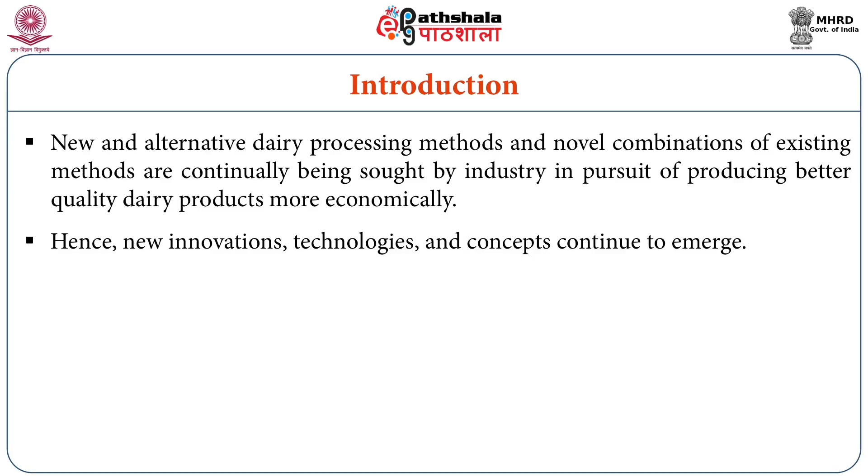New and alternative dairy processing methods and novel combinations of existing methods are continually being sought by industry in pursuit of producing better quality dairy products more economically. Hence, new innovations, technologies and concepts continue to emerge.

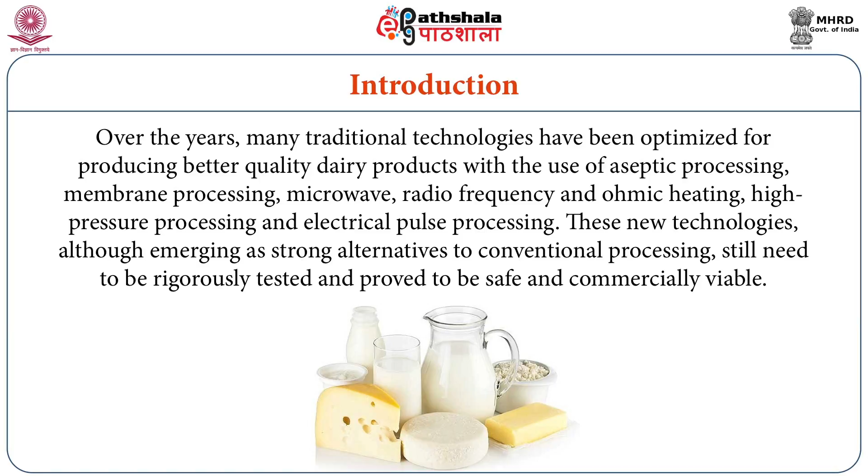Over the years, many traditional technologies have been optimized for producing better quality dairy products with the use of aseptic processing, membrane processing, microwave heating, radio frequency and ohmic heating, high pressure processing and electrical pulse processing. These new technologies, although emerging as strong alternatives to conventional processing, still need to be rigorously tested and proved to be safe and commercially viable.

Dear students, now let us discuss membrane processing. Membrane processing is a pressure driven process in which semi-permeable membranes are used to separate out constituents of milk by use of physical or chemical properties of different constituents. Different membrane processes are ultrafiltration, nanofiltration, reverse osmosis and microfiltration. We will discuss each process one by one with their application in the dairy industry.

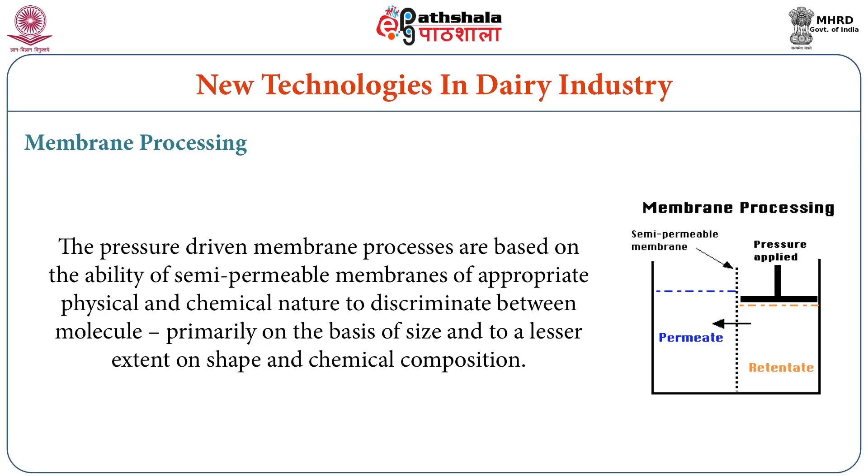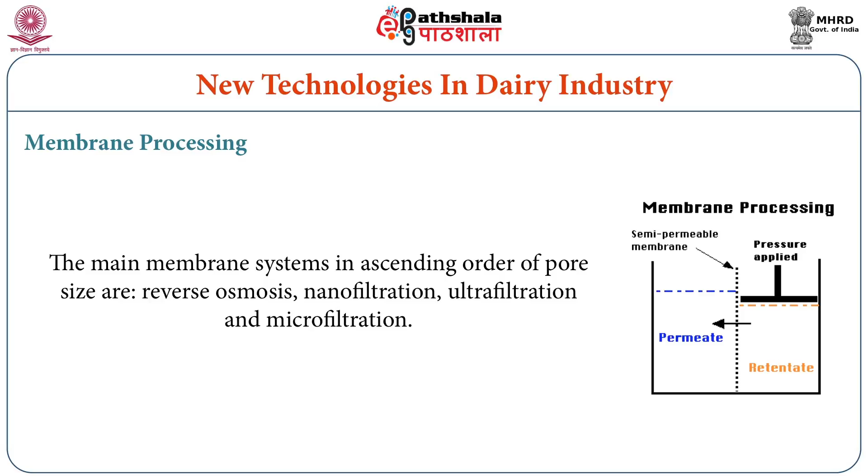The first new emerging technology is membrane processing. The pressure driven membrane processes are based on the ability of semi-permeable membranes of appropriate physical and chemical nature to discriminate between molecules primarily on the basis of size and to a lesser extent on shape and chemical composition. The main membrane systems in ascending order of pore size are reverse osmosis, nanofiltration, ultrafiltration and microfiltration.

The first and foremost used membrane processing application in dairy industry is through ultrafiltration. Ultrafiltration has a wide range of applications in the dairy industry. Ultrafiltration membranes allow separation of smaller molecular weight substances ranging from 10,000 to 75,000 Daltons with operating pressure ranging between 10 to 200 psig.

Ultrafiltration produces from milk a permeate containing water, lactose, soluble minerals, non-protein nitrogen and water soluble vitamins, and a retentate in which proteins, fats and colloidal salts content increases in proportion to the amount of permeate removed.

The ultrafiltration process has been used for milk protein standardization, deproteinization of whey, fractionation of proteins, preparation of biological peptides, manufacture of rasgulla mix powder, preparation of protein rich milk, low lactose powder, manufacture of milk protein concentrates, manufacture of whey protein concentrates or isolates, etc.

Ultrafiltration process has also been used for the manufacture of several fermented dairy products like yogurt, Shrikhand and various types of soft and semi-soft varieties of cheeses. Second membrane processing is reverse osmosis.

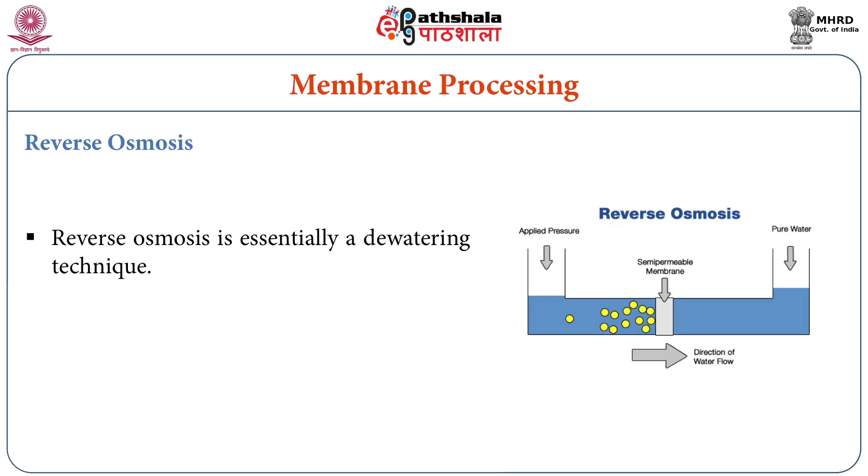Reverse osmosis is essentially a dewatering technique. It can be used for pre-concentration of liquid feed for different purposes. The reverse osmosis membranes are characterized by a molecular weight cutoff of nearly 100 Daltons and pressures involved are 5 to 10 times greater than those used in ultrafiltration.

The potential applications of reverse osmosis technology are bulk transportation of reverse osmosis concentrated milks, pre-concentration of milk for khoa making and spray drying, utilization of pasteurized reverse osmosis concentrate in place of market milk, partial concentration of whey, and partial concentration of buttermilk.

Third important membrane process is nanofiltration. Nanofiltration is a demineralization process. Acid whey can be partially demineralized to about 40%, particularly with respect to the monovalent ions, and concentrated simultaneously to approximately 25% total solids using the nanofiltration process.

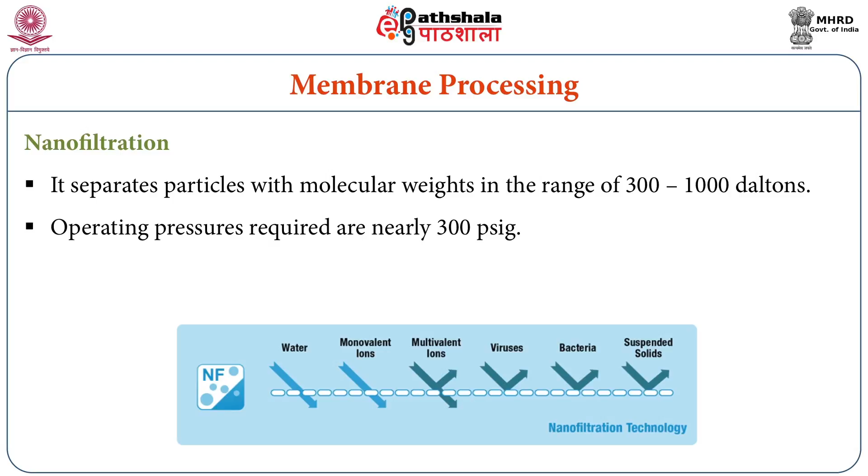It separates particles with molecular weight in the range of 300 to 1000 Daltons. The operating pressures required are nearly 300 psig.

Another membrane processing is through microfiltration. Microfiltration is essentially used as a clarifying process to remove macromaterials and suspended solids, milk fat globules, bacteria and colloidal particles. In microfiltration, membranes with pore size ranging from 0.1 to 10 micron and operating pressure in the range of 1 to 25 psig are used.

The most significant application of microfiltration in the dairy industry is for selective separation of bacteria from milk.

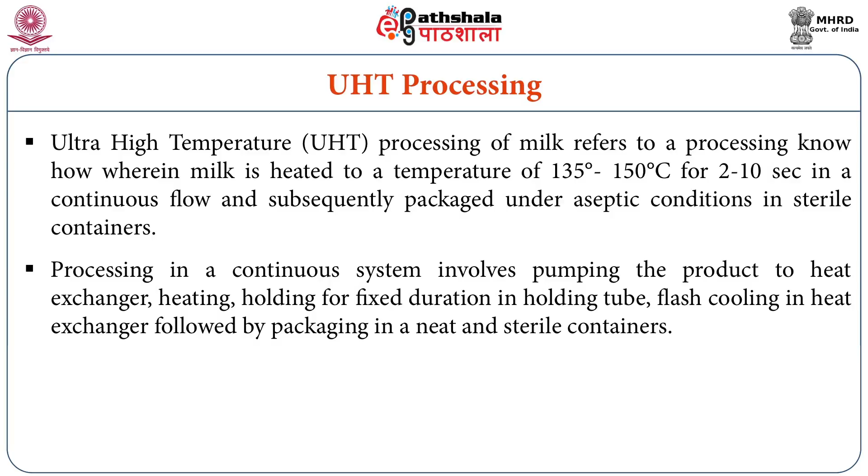Another emerging technology in dairy is UHT processing. Ultra high temperature or UHT processing refers to heating milk to 135 to 150 degrees Celsius for 2 to 10 seconds in a continuous flow, then packaging under aseptic conditions in sterile containers. The continuous system involves pumping the product to a heat exchanger, heating, holding for a fixed duration in holding tubes, flash cooling in a heat exchanger, followed by packaging in neat and sterile containers.

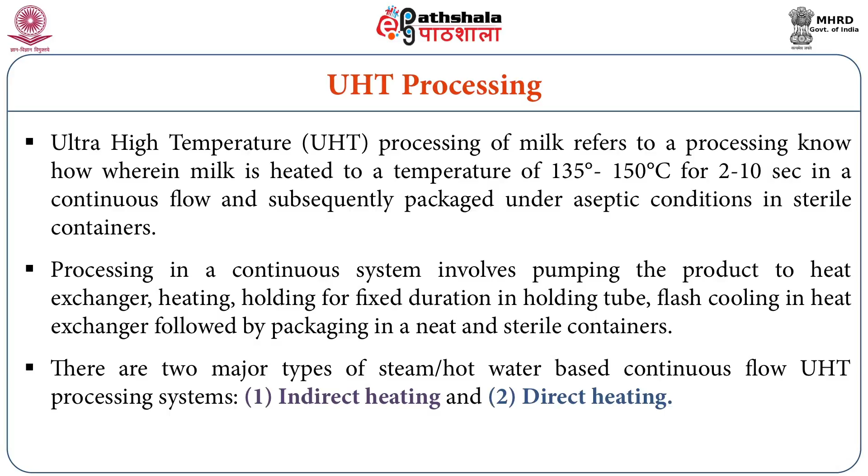There are two major types of steam or hot water based continuous flow UHT processing systems. The first is indirect heating, where the heating medium and the product, that is milk, do not come into contact with each other. The second is direct heating, in which steam is infused into the medium, milk, for UHT processing.

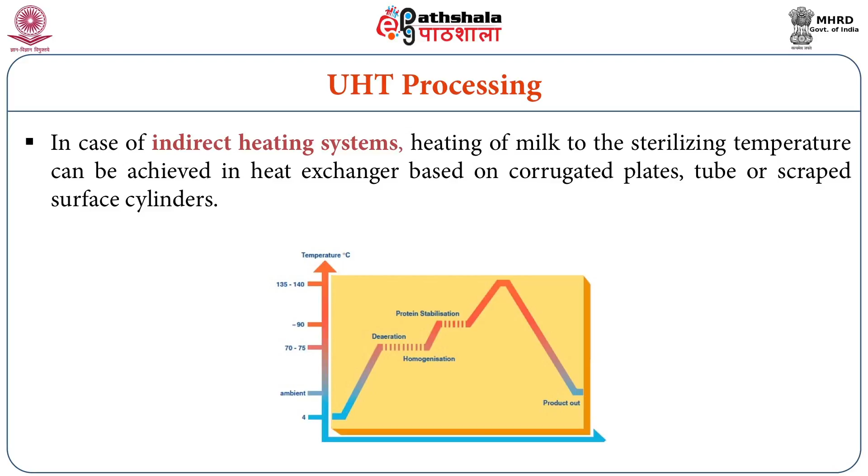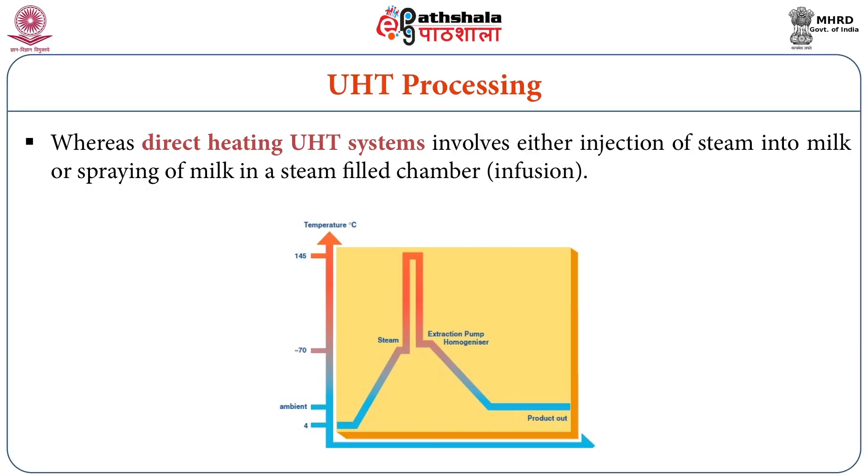In an indirect heating system, heating of milk to sterilizing temperature can be achieved in a heat exchanger based on corrugated plates, tubes, or scraped surface cylinders. Whereas a direct heating UHT system involves either injection of steam into milk or spraying of milk into a steam-filled chamber, also known as infusion.

Ohmic heating is also known as electric resistance heating, direct electric resistance heating, electroheating, and electroconductive heating. The most important benefit of ohmic heating is that heating is very rapid and uniform. The process is ideal for shear sensitive products. Ohmic heating can heat food continuously without needing a hot heat transfer surface, a scraped surface heat exchanger, or tubular heat exchanger.

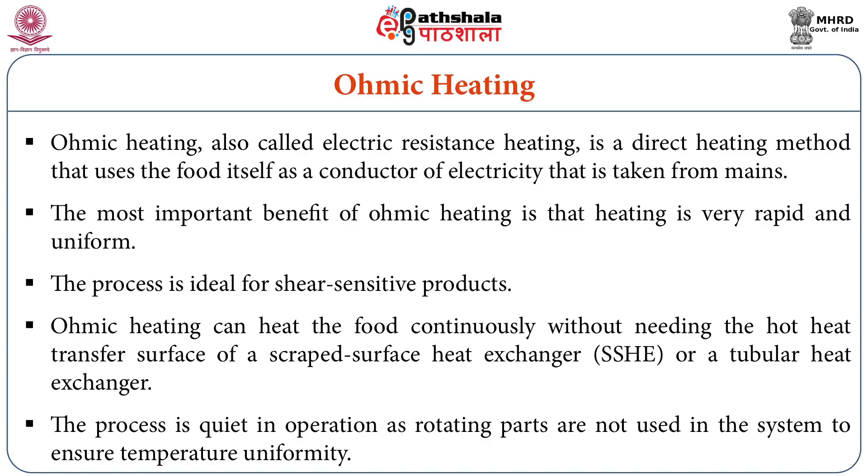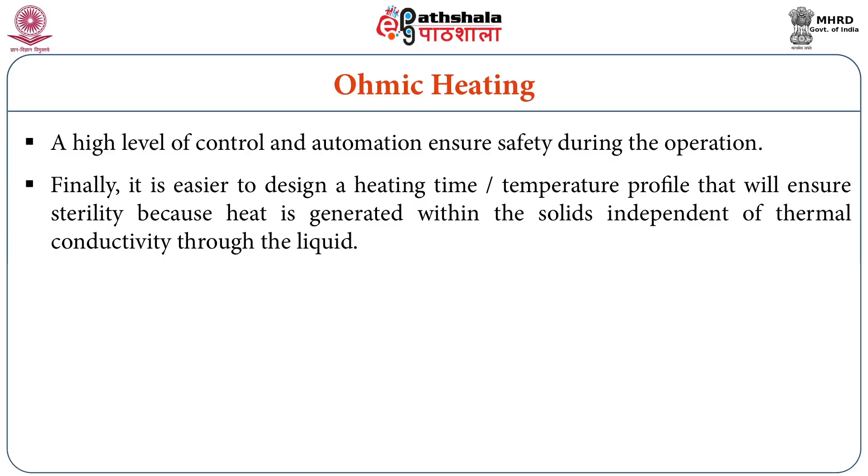The process is quiet in operation as rotating parts are not used in the system to ensure temperature uniformity. A high level of control and automation ensures safety during operation. Finally, it is easier to design a heating time temperature profile that will ensure sterility, because heat is generated within the solids independent of thermal conductivity through the liquid.

Microwaves are a form of electromagnetic radiation characterized by wavelength and frequency, ranging from 300 MHz to 300 GHz. Microwaves used in the food industry for heating are of ISM, that is industrial, scientific and medical, frequencies ranging from 900 MHz to 2450 MHz, corresponding to 12 or 33 cm in wavelength. In this frequency range, the dielectric heating mechanism dominates up to moderate temperatures.

Polar molecules, dominantly water, try to align themselves with the rapidly changing direction of the electric field. The energy to achieve this alignment is taken from the electric field. When the field changes direction, the molecules relax and the energy previously absorbed is dissipated into the surroundings, directly inside the food. This means the water content of the food is an important factor in microwave heating performance.

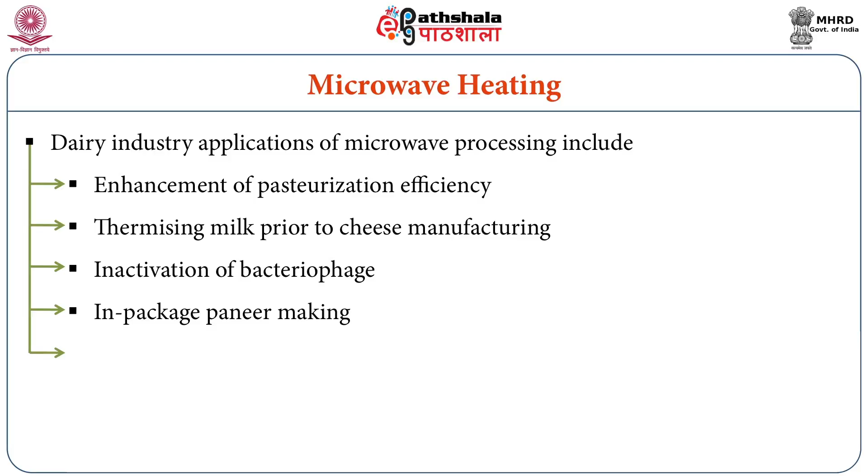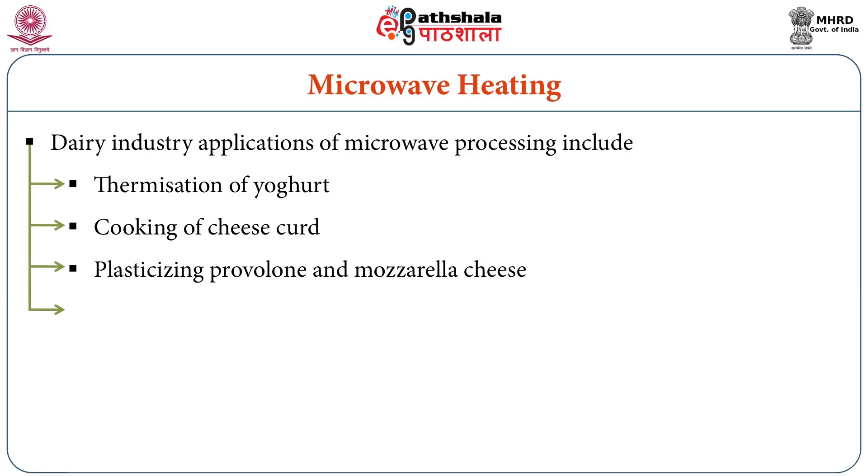Dairy industry applications of microwave processing include enhancement of pasteurization efficiency, thermizing milk prior to cheese manufacturing, inactivation of bacteriophage, in-package paneer making, clarification of butter into ghee, thermization of yogurt, cooking of cheese curd, plasticizing provolone and mozzarella cheese, and thawing butter.

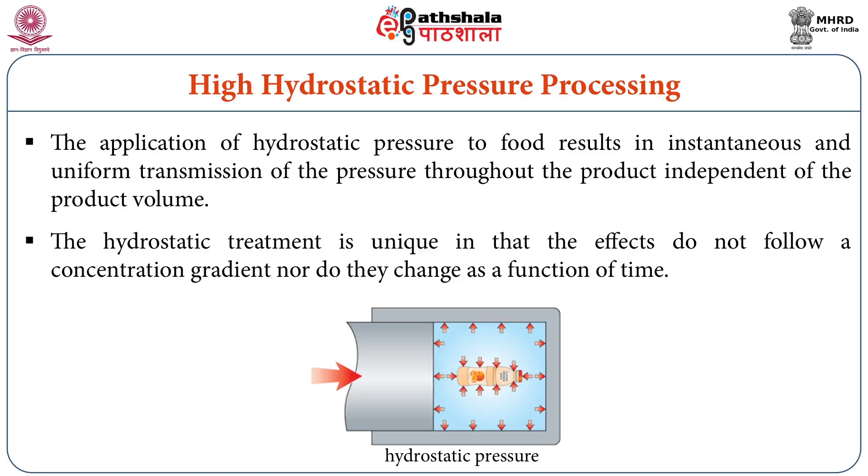The application of hydrostatic pressure to food results in instantaneous and uniform transmission of the pressure throughout the product, independent of product volume. The hydrostatic treatment is unique in that the effects do not follow a concentration gradient, nor do they change as a function of time.

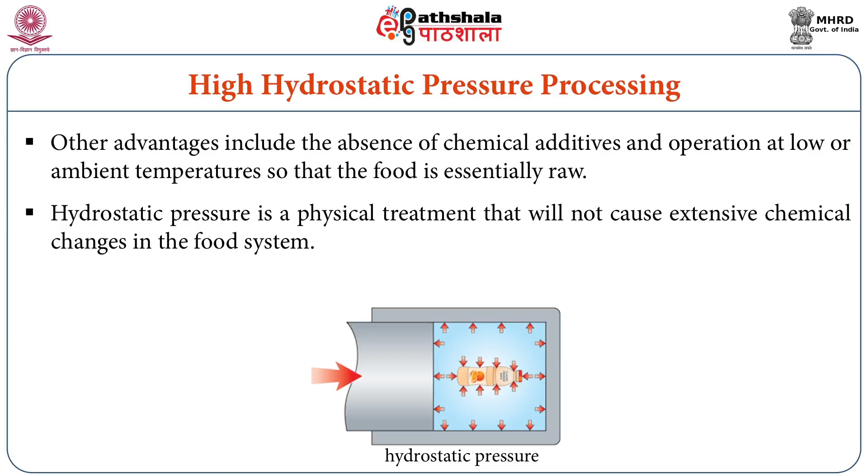Other advantages include the absence of chemical additives and operation at low or ambient temperatures, so that the food is essentially raw. Hydrostatic pressure is a physical treatment that will not cause extensive chemical changes in the food system. Once the desired pressure is reached, it can be maintained without the need for further energy input.

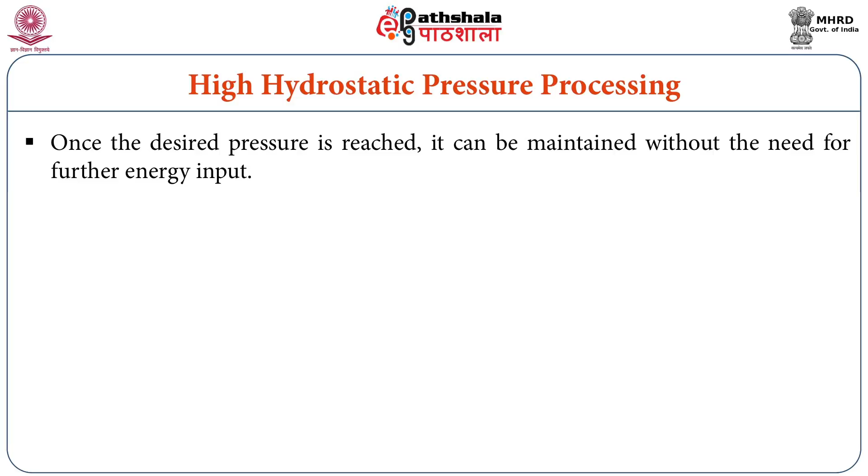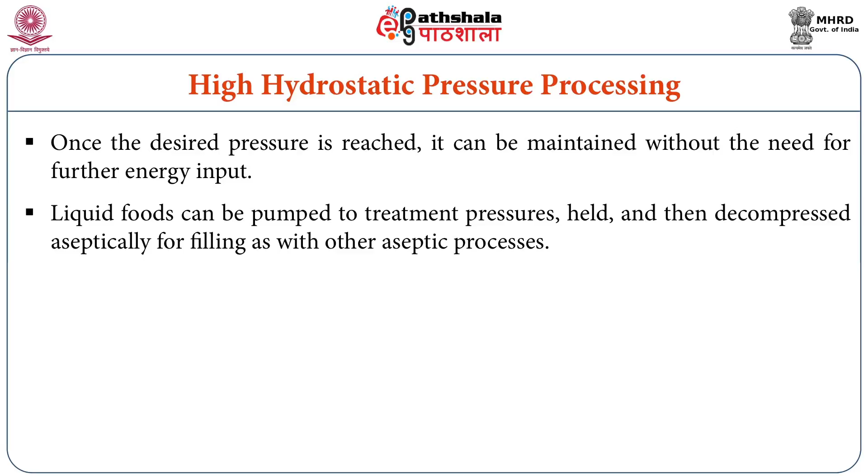Liquid foods can be pumped to treatment pressures, held, and then decompressed aseptically for filling, as with other aseptic processes. The application of high pressure processing to food preservation started around 1900, when Hite and his co-workers investigated its effect on food microorganisms by subjecting them to a pressure of 650 megapascals and found a reduction in the viable number of microbes.

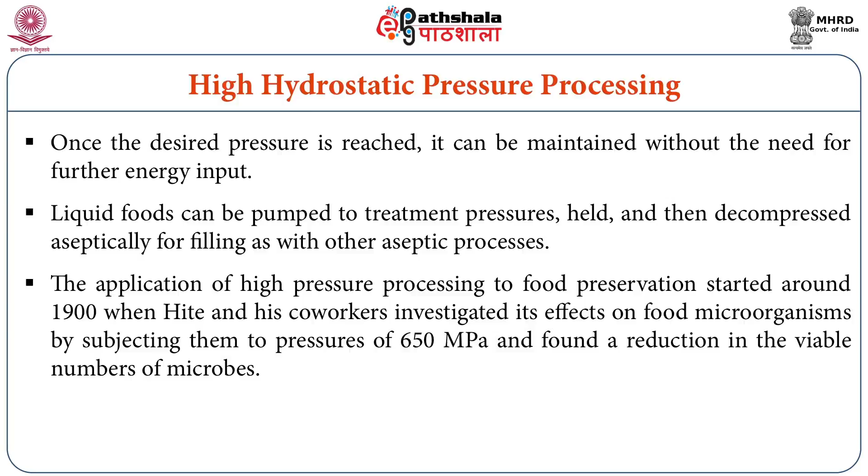Pulsed electric field heating. High intensity pulsed electric field processing involves the application of pulses of high voltage, typically in the range of 20 to 80 kilovolts per centimeter, to foods placed between two electrodes. Pulse electric field treatment is conducted at ambient, subambient or slightly above ambient temperatures for less than 1 second, as a result of which the energy loss due to heating of food is minimized.

Pulse electric field technology is considered superior to traditional heat treatment of foods because it maintains food quality by avoiding or greatly reducing detrimental changes to the sensory and physical properties of foods. The use of pulse electric fields for inactivating microorganisms is a promising non-thermal processing method that can be used for pasteurization and possibly also sterilization with the integration of other processing parameters such as pH, ionic strength, temperature and high pressure processing.

Osmotic dehydration. The concentration of food products by product immersion in a hypertonic solution is known as osmotic dehydration. Osmotic dehydration consumes less energy compared to air drying and freeze drying because water removal occurs without a phase change. Heat damage to the food product is minimum in case of osmotic dehydration as the product is not subjected to a high temperature for extended periods. Successful attempts have been made to dehydrate traditional Indian dairy products such as rasmalai, rasgulla and paneer using osmotic dehydration technology.

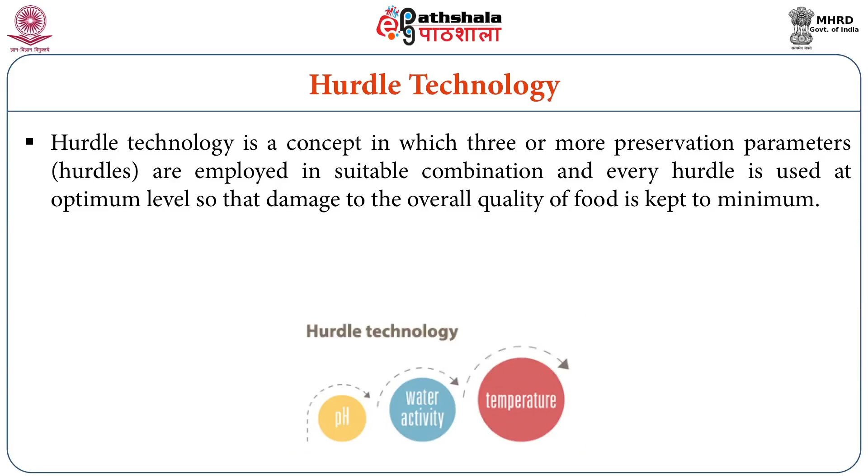Another very important preservation technology is hurdle technology. Hurdle technology is a concept in which three or more preservation parameters known as hurdles are employed in suitable combination, and every hurdle is used at optimum level so that damage to the overall quality of food is kept to a minimum. Hurdle technology has been tried for preservation of several Indian dairy products such as milk cake, paneer and paneer curry.

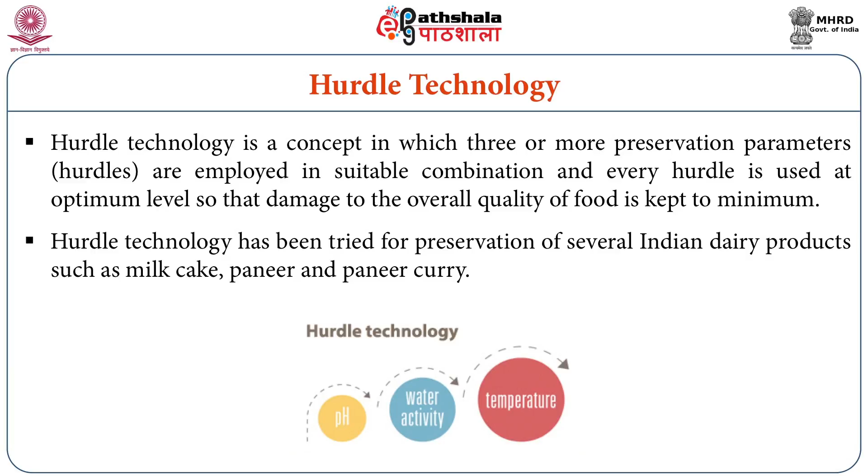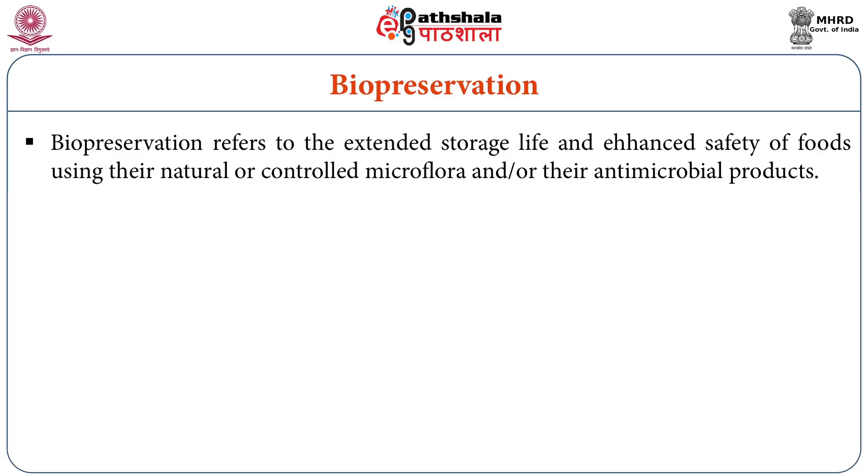Biopreservation. Biopreservation refers to the extended storage life and enhanced safety of foods using their natural or controlled microflora and/or their antimicrobial products. The diverse group of lactic acid bacteria synthesize a variety of inhibitory substances such as organic acids, carbon dioxide, hydrogen peroxide, diacetyl, bacteriocins, etc., which prevent the development of undesirable bacteria.

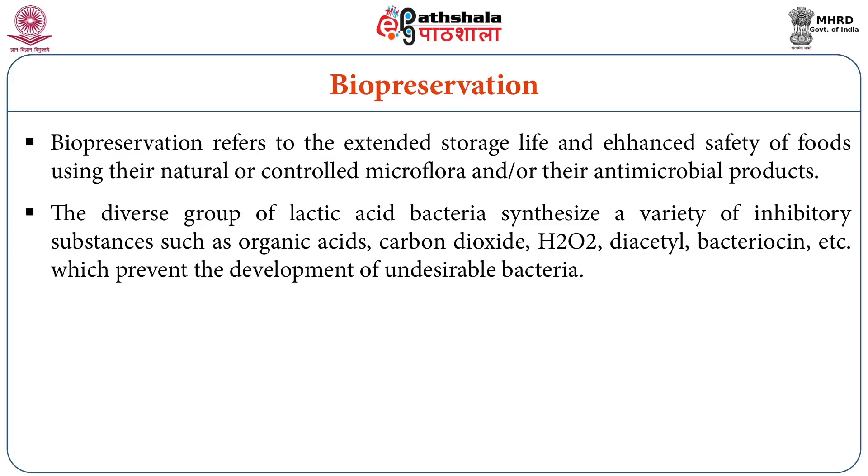Now let us discuss some of the product developments in dairy industry. Consumers' demands keep changing over time. These changes range from basic considerations such as improving food safety, shelf life and reducing wastage to demands for increasingly sophisticated foods having special characteristics in terms of nutritional value, therapeutic value, palatability and convenience. One such development in dairy industry is probiotic foods.

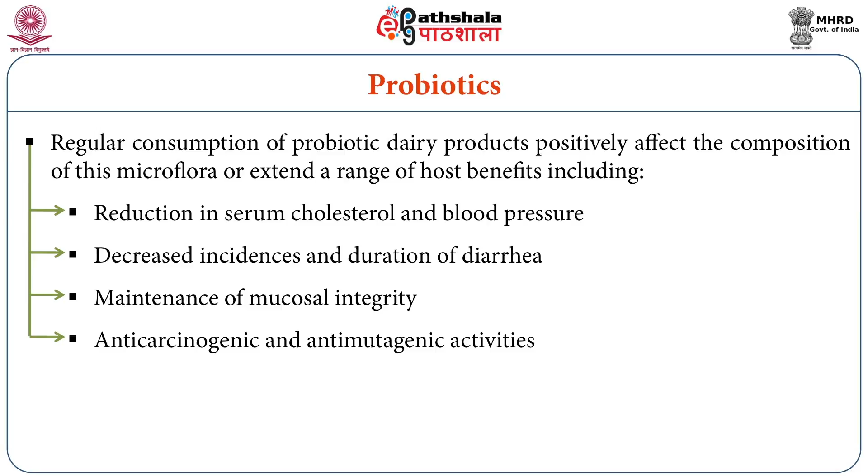A probiotic is a mono or mixed culture of live microorganisms which benefit host by improving the properties of the indigenous microflora. Regular consumption of probiotic dairy products positively affects the composition of this microflora or extends a range of host benefits including reduction in serum cholesterol and blood pressure, decreased incidences and duration of diarrhea, maintenance of mucosal integrity, anti-carcinogenic and anti-mutagenic activities, immunostimulation and immunomodulation, pathogen interference, exclusion and antagonism.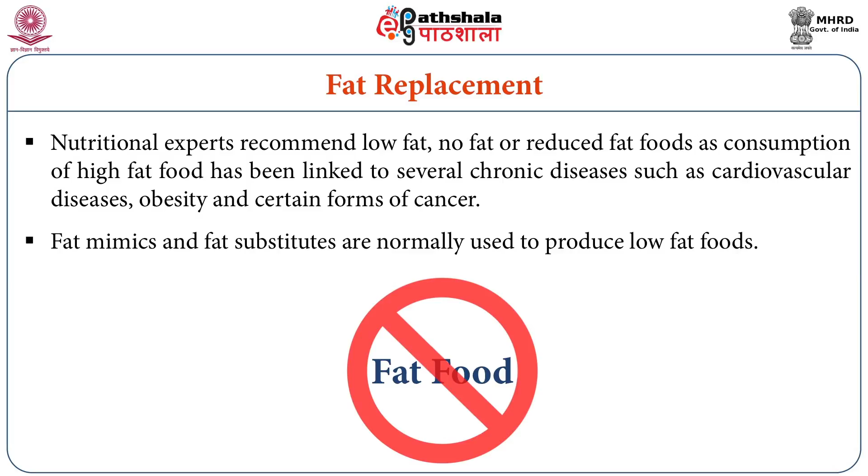Fat replacement. Nutritional experts recommend low fat, no fat or reduced fat foods as consumption of high fat foods has been linked to several chronic diseases such as cardiovascular diseases, obesity and certain forms of cancers. Fat mimics and fat substitutes are normally used to produce low fat foods. Fat mimics are substances that help replace the mouthfeel of fat but cannot substitute for fat on a gram for gram basis and cannot be used for applications involving frying.

Substances whose physical or thermal properties resemble fat are termed as fat substitutes and can replace fat on a gram for gram basis and can also be used for frying applications. Low fat cheese, cultured products, frozen desserts, butter and spreads have been successfully developed using commercially available fat mimics or fat replacers.

Dear students, at the end I would like to conclude that many new technologies are emerging in the field of dairy industry. They are membrane processing, UHT processing, ohmic heating, pulsed electric field, high hydrostatic pressure processing, biopreservation, hurdle technology, osmotic dehydration. These technologies are emerging but they are at very small scale.

Then we have discussed new product development concepts such as probiotic foods, fat mimetics, fat replacers to produce low calorie foods. Thank you.